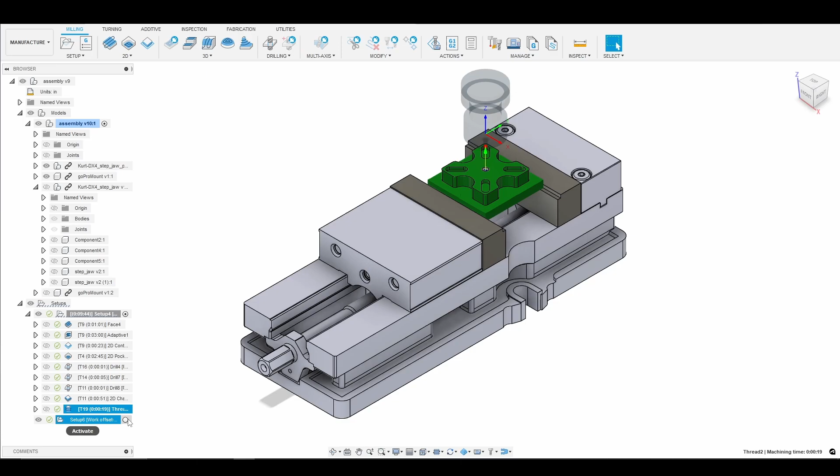All right, so we're going to go ahead and switch over to our second operation. The first thing I'm going to do is go edit, and I'm just going to double check that I have from preceding setup selected, which I do, and I have continue rest machining, so that is all good. So now we'll go ahead and get into our 3D adaptive clearing. All right, so we'll go up to 3D adaptive clearing.

We'll go ahead and select our 3 flute YG1 end mill. That's 3/8 shank diameter. We will click OK. We are at 7,500 RPM. We'll cut at 50 inches per minute. That gives us right around 2 thou per tooth. We'll skip over geometry since we're using a 3D toolpath. Fusion will take the geometry into consideration for us.

However, we'll need to make some changes to our heights tab. So our top height is a stock top, so that's correct. We want to start at the top of the material after we flipped our part. However, we do not want to go to the bottom of our part after we flipped it. We want to go to the top surface, which would be the surface shown here with the circular pockets in it. So we will choose the model top, and we'll also need an offset, and I'll show you why here in a few minutes, but let's go ahead and continue on.

Okay, so we'll go to optimal load, and I want to use 30 thousandths. I typically use around 10% the diameter of my tool. 30 thousandths is right at 8%. We're going to take everything full depth of cut, so we don't need to change our maximum roughing step down. Leaving 20 thousandths worth of stock is fine.

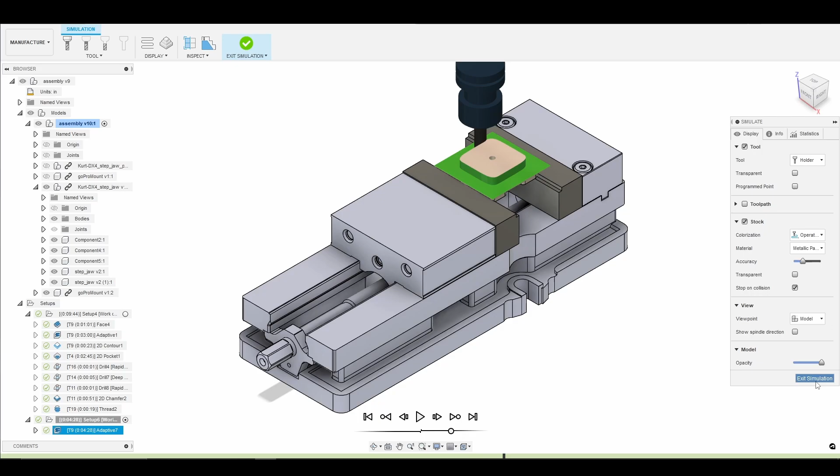And I will show you why we want to go change the offset. So if I just move the timeline here, you'll notice we're leaving this thin piece of stock. So what I want to do is go ahead and click exit. And we just want to go below the top surface of our model slightly so that we don't leave that thin piece of stock. So if I go to edit, we go back to our heights, and I'm just going to put in a small offset of minus 30 thousandths. So we're below the top of our model here by 30 thousandths. We'll click OK. We'll go back and simulate again.

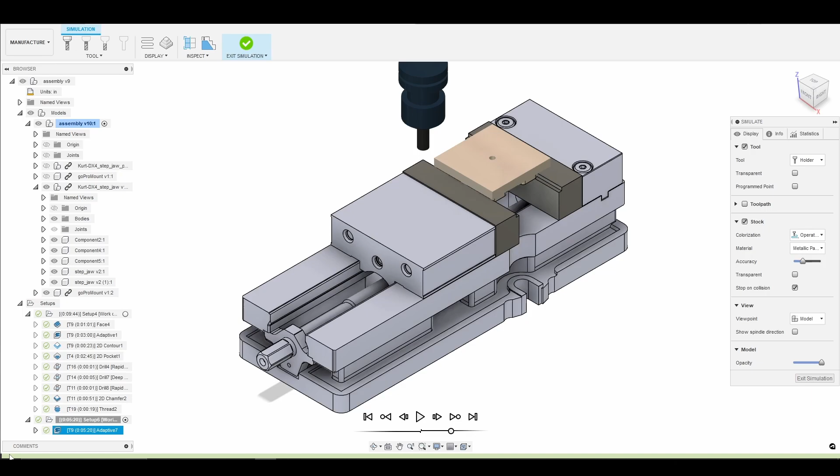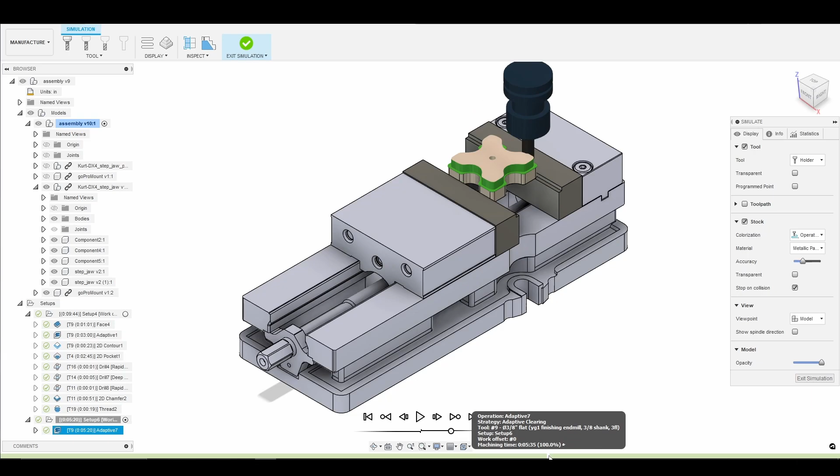And now you'll notice that we go down and we machine around the contour of the part, not leaving any thin layer of stock. So there we are, just clearing around the contour of our part. And then we'll go ahead in a nice smooth circular motion, keeping that constant tool engagement, which the adaptive clearing toolpaths are meant to do, and just clearing the stock off the top of our model. There we go. So that's good. I'm happy with that toolpath. We'll go ahead and exit the simulation.

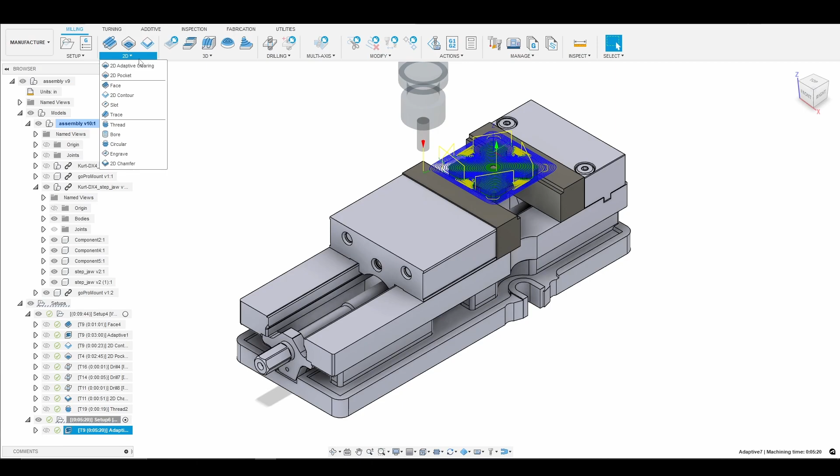And now what we want to do is get into a facing toolpath. And again, we'll use the same end mill just to limit the amount of tools we're using and the amount of tool changes because I don't have a tool changer. So I'll go ahead and do that now. We'll go to 2D. We'll select 2D face. Again, I want to go into my tool library for my Tormach and select the YG1 end mill. Select OK.

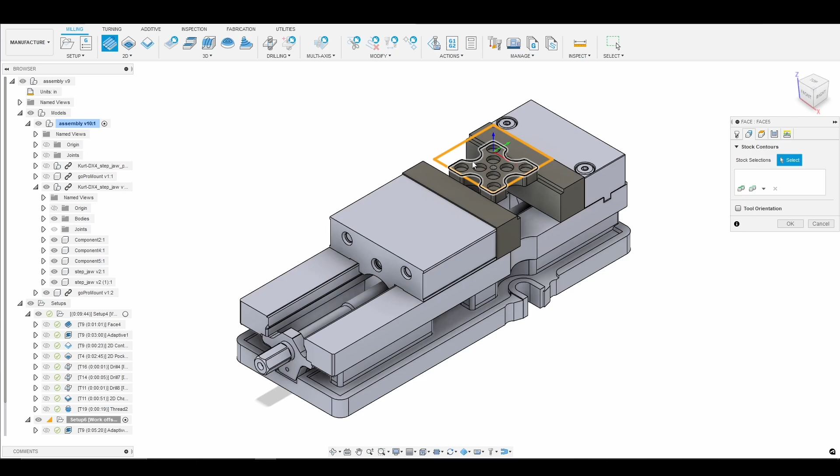Again, we're going to run at 50 inches per minute, 7,500 RPM. We will go into geometry this time, and we'll just select the contour around the top of our part. So that looks good. We'll go into the heights tab, and what I will do is I will change the top height. It is no longer the stock top because we used the adaptive clearing to remove most of the material off the top of our part.

However, you do remember we left 20 thousandths worth of stock. So what I'm going to do is change this to model top, and then I'm going to change our offset to 20 thousandths because that is the amount of stock we left on the top. I'll go ahead and change our retract height to feed height. So we're retracting from our feed height. Okay, so that all looks good.

We'll then go into passes. I'm going to change the step over to be 50% the diameter of the tool. It's a 3/8 inch tool, so we'll adjust accordingly. So that looks good. We're not using multiple depths. It's only 20 thousandths worth of material, so we're just going to blaze through it at 50 inches per minute. Go into linking. I always do extend before retract just to make sure we don't dwell at the edge of the part and leave any sort of tool marks.

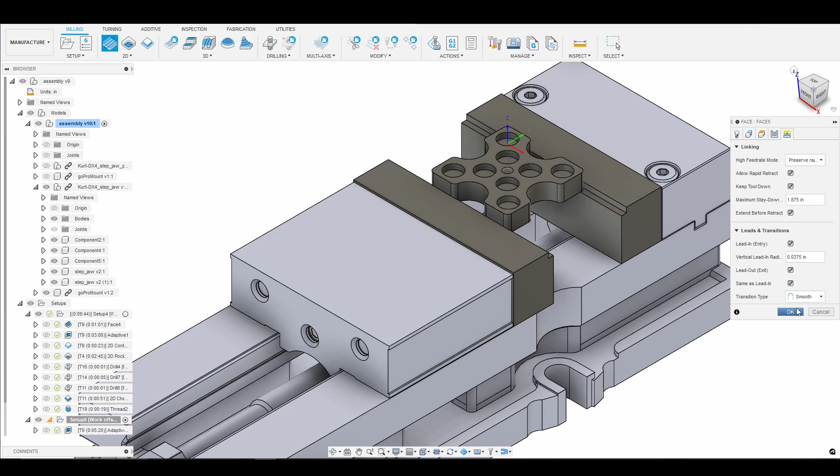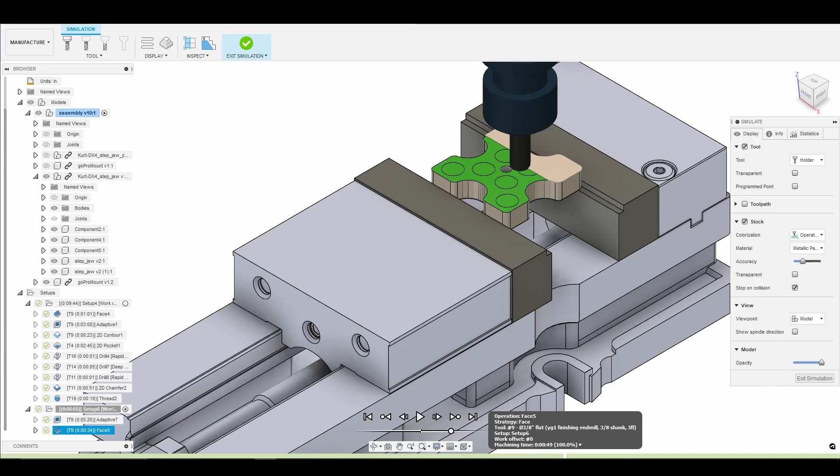We'll click OK, and then we'll simulate, see what our toolpath looks like. All right, so again, I'm just going to drag the timeline here so I have some control. All right, everything looks good so far. You'll notice there we are going all the way off of our part, which is good. All right, go toward the end here. I don't like that, so if we zoom in, it looks like we may have left a thin sliver of stock. We'll continue and see if we clean that up with another pass.

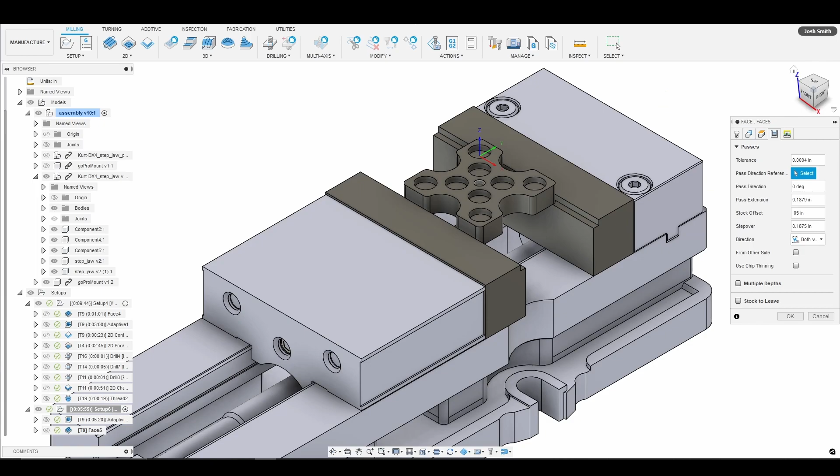No, we do not. So what I'm going to do is go back into the facing operation. I'm going to go to passes, and I'm just going to leave a stock offset of, let's say, 50 thousandths. Okay. And now we'll go ahead and right click and simulate again. And we're just going to drag the timeline all the way to the end here.

And there you go. We'll go to the right hand view, and our tool is going off the side or off the top of our part, making sure we're not leaving any thin sliver of stock. So everything looks good there. I'm happy with the toolpath.

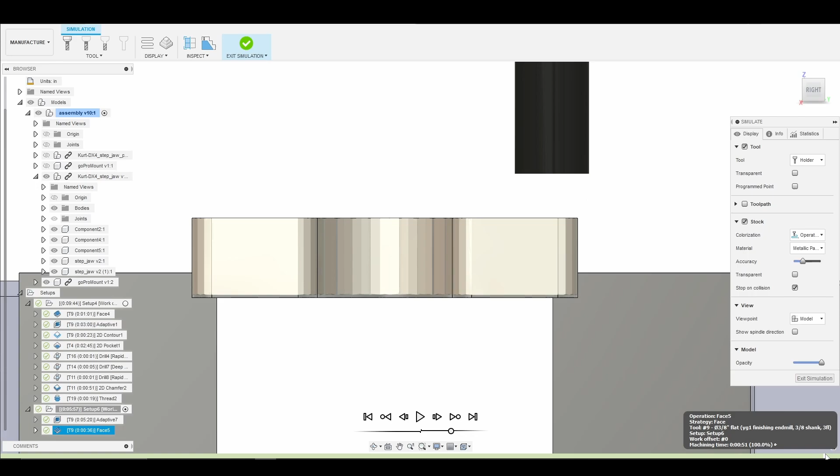All right, so now what we want to do is go ahead and set up a 2D pocketing toolpath and remove the material for the circular pockets and make room for the magnets that we're going to glue in. So I'm going to go to 2D. I'm going to go to pocket. We'll again select our tools. I'm going to go to my Tormach library and choose the 1/8 inch 3 flute Shars end mill. So I'll go ahead and select that.

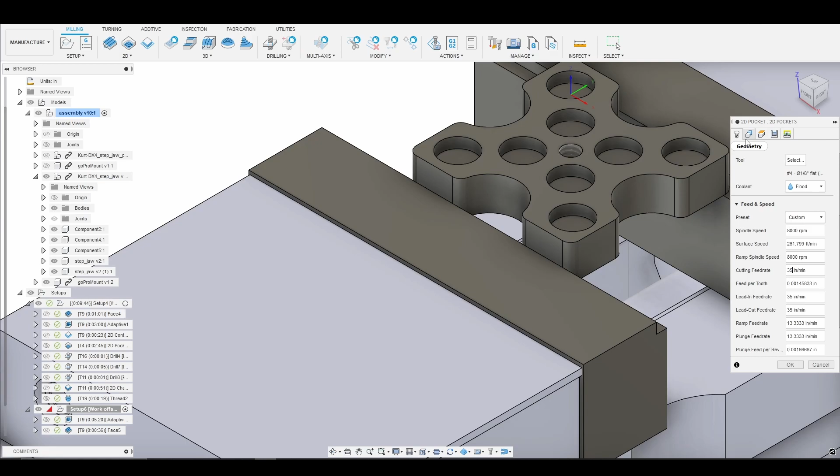We're going to be running at 35 inches per minute and 8,000 RPM. That gives us around 1.4 thousandths per tooth. Okay, everything looks good there. We'll go ahead and go into geometry, and we're just going to select all of our holes. Okay, everything looks good there. All right, and then we will go into our heights.

So this needs to be edited slightly. We want our top height to be the model top, not the stock top. If we left it at the stock top, we would essentially cut a bunch of air and waste machining time. So we're going to change this to model top. All right, that all looks good to me. I will change the retract height to start from the feed height.

We'll then go into passes. Again, I want to select a maximum step over that is 50% the diameter of our tool. So I will go ahead and enter that in now.

All right. What I will also do is go ahead and enable a finishing pass. So we'll go ahead, pocket the holes, and finish them all at the same time. So one finishing pass is fine. We'll make our finishing step over 10 thou. I think all that looks good.

We do want to go multiple depths, and we don't want to leave any stock. So I'm going to go ahead and uncheck stock to leave. Multiple depths, again, I'm slightly worried about tool deflection since we're using such a tiny end mill, 1/8 of an inch. So I'm going to change the maximum step down to 30 thousandths. Okay, that looks good to me.

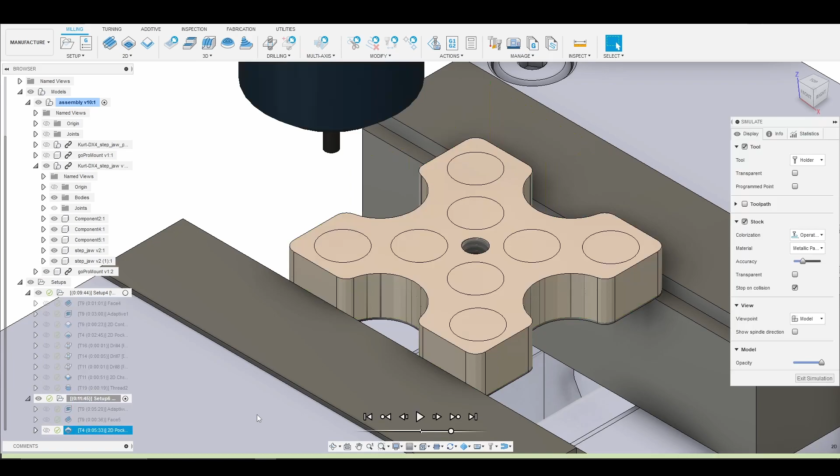So what I will do again is just right click and simulate. We'll just step through the timeline here so you can see we just helical in and then we take 30 thousandths each time and just remove stock all the way to the bottom of the pocket. Okay, so that all looks beautiful. So what I'll do is just speed this up a little bit. Just make sure there's no collisions, make sure we don't crash our machine. Everything looks good to me, so that does it for our pocketing toolpath.

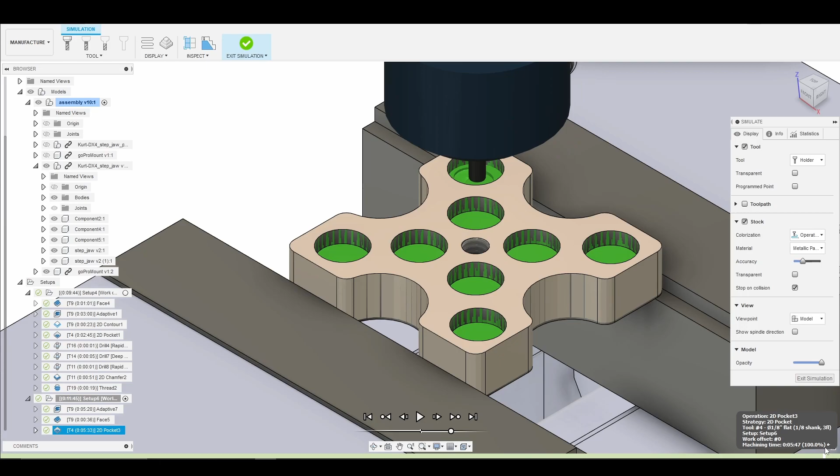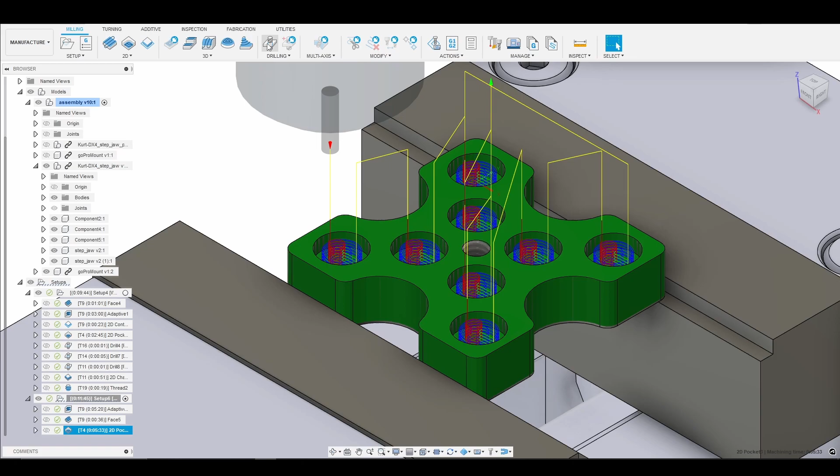So next what we'll do is similar to Op1, we'll come straight down with our chamfer mill. We'll chamfer the center hole here, and then we'll chamfer all the pockets and around the outside contour of our part. All right, so we'll go up here and we will select a drilling routine. We'll go ahead and try to select our tool. And remember, we want to use our 90-degree chamfer tool, so we want to select milling. And then I'm going to select my 3/8 inch lemur chamfer. So let's see if we can find it. All right, here we go. So we'll go ahead and select that tool.

And then what we want to do is go to geometry. So let's go over the speeds and feeds real quick. We are at 4,000 RPM and a plunge rate of right around 13 inches per minute. So now we'll go to geometry. We will select our hole. And again, when we're drilling, it's very, very important to pay attention to our top height and our bottom height. So our top height being the hole top is fine. However, we do not want our bottom height to be the hole bottom, else we would try to plunge our chamfer mill all the way through our part, which would definitely be a crash. We would either break the end mill or damage our machine.

So what I'm going to select is the hole top. And again, we're going to go down 130 thousandths. And if you don't know why I'm choosing 130 thousandths, go ahead and go 2 tutorials back where I go over some basic trigonometry with the angle of the chamfer mill and the 3/8 width, and we figure out how deep we need to go to make sure that we get the tip to line up with our 1/4 inch diameter hole.

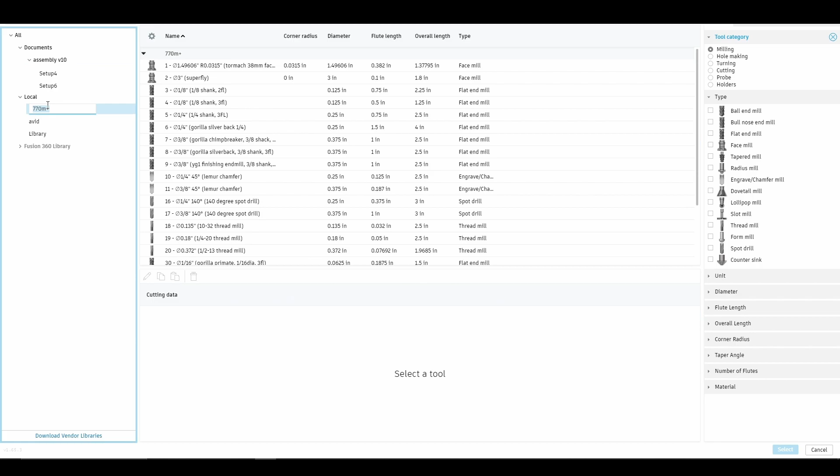And so now what we're going to do is one last toolpath, which is, again, we're going to use the same tool and just chamfer all of the pockets and the outside contour of our part. So we'll go to select tool, we'll go to the Tormach library that I have set up, and again our 3/8 inch 45-degree chamfer tool. We'll select OK.

Running at 4,000 RPM, 20 inches per minute. Gives us right around 1 thou per tooth. So what I want to do now is go to the geometry. We'll do the outside contour of our part and then all of the pockets. Bear with me here. There we go.

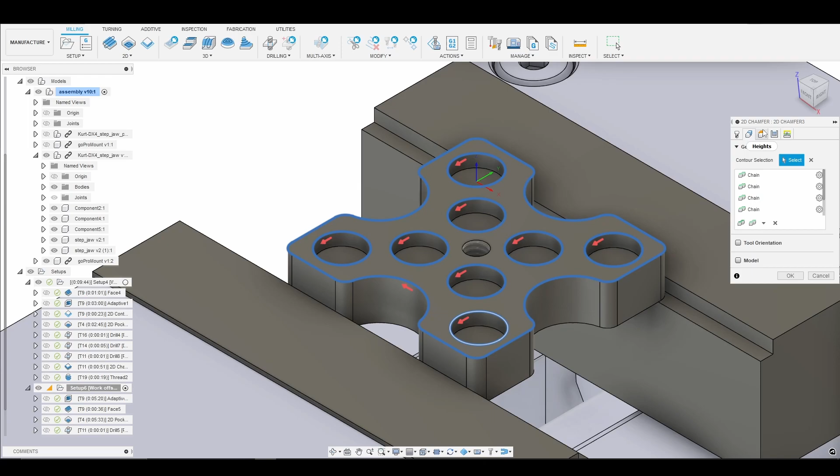So now what we'll do is we'll go to our heights. So here we don't want to go stock top, sorry. We'll make this our model top. We've removed all of the stock from our part, so model top would be the right selection. We'll then go into passes, and the only thing I'm going to change here is I want a chamfer width of 15 thousandths.

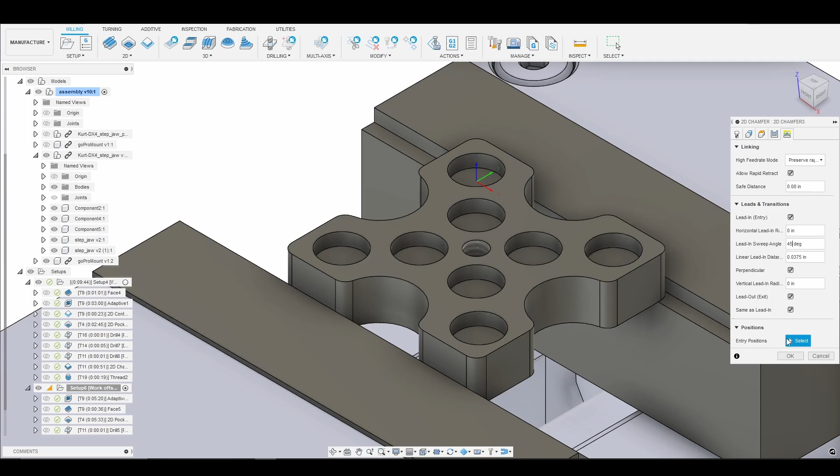Alright, and I think that works for me. I'll enable smoothing and feed optimization. And in linking, I'll go ahead and make our lead-in sweep angle 45 degrees. Alright, we'll click OK. And then we'll go ahead and simulate again.

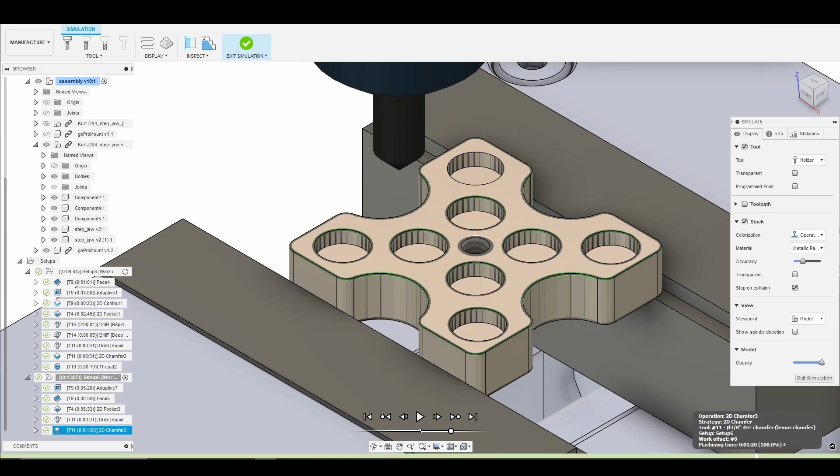And we'll just drag the timeline here. So we're just going through and chamfering the pockets. Here we go with the outside. And then we go back in and chamfer those pockets again. So that all looks beautiful to me. So that does it for our GoPro mount.

I hope everyone enjoyed the tutorial series. I just got myself a MicroARC, so hopefully we will get into some 4th axis parts soon. That will be interesting. It's my first time using a 4th axis, so I'm trying to wrap my head around the probing routines, etc. So I imagine once I figure all that out, we'll go through it in a nice video tutorial as well. So again, I hope you like this.

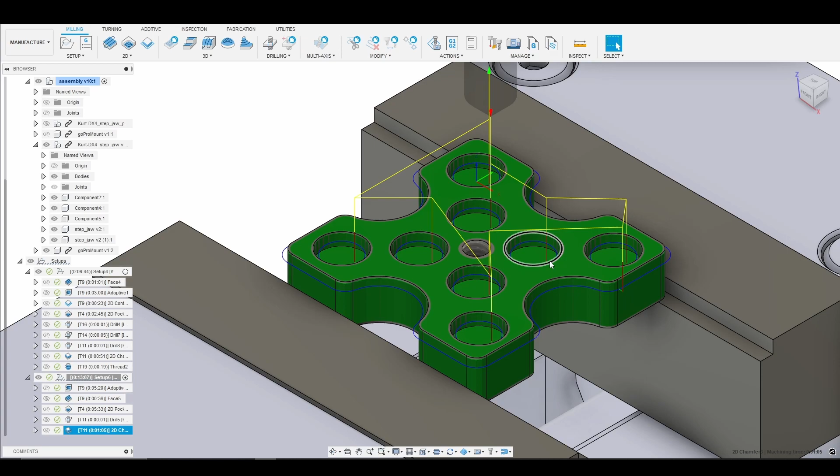We're jumping right into our 2D adaptive clearing with the YG1 end mill, 3/8 inch diameter, 3 flute moving at 50 inches per minute. You'll notice my part is off to one side against my work stop. My work stop attaches to the side of my jaw. I'm using a pair of step jaws with a 1/8 inch step. Ideally, I would have some sort of gauge block or another part in the other half of the vise just to ensure even clamping pressure.

Again, if you don't want to do the 2D adaptive clearing and then the face after, if you want to use a facing tool like a shell mill or the Superfly for example, and just go ahead and deck the top of the stock off that way, you could do that instead of doing the adaptive clearing and then the facing operation. So again, now we're just jumping into the facing operation using the YG1 end mill, going 50 inches per minute, 50% diameter tool in terms of step over.

I got a nice surface finish. I was happy with it, happy with the fog buster providing the coolant and not getting either chips and or droplets of coolant all over my GoPro lens, so that was nice.

So now we're going to transition into the 2D pocketing operation where we're using the Shars 1/8 inch 3 flute end mill, again going 50% diameter of the tool in terms of step over, 35 inches per minute, and just making all the circular pockets for the magnets that we're going to glue into the back of our GoPro mount.